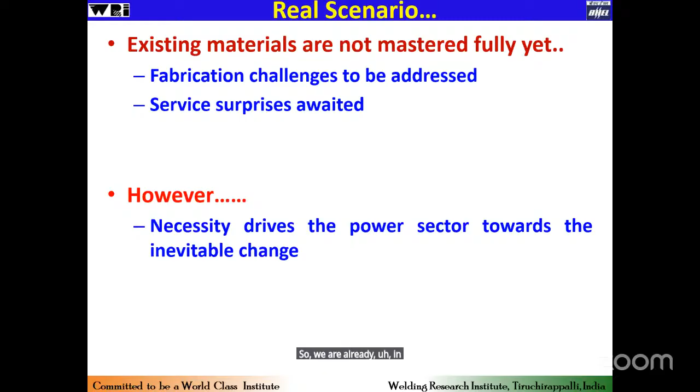I would like to start by sharing some experience with respect to the challenges in the chromoly steel segment itself. These are some of the persisting challenges the power sector industry faces. Long and thick components, when made of high chromium steel, will have multiple joints to be made, especially for header stub kind of applications.

When we talk about higher chromium moly kind of steels, we call them creep strength enhanced ferritic steels. These steels necessitate strict discipline, especially in handling and fabrication. The atmospheric control has to be very stringent - it will not tolerate like what carbon steel does.

There may be a requirement of intermittent heat treatment, especially for thick section fabrication. We may not be able to complete it in one go, or in certain cases we may have to go for repair welding after intermittent or interstage examination. We don't know how many heat treatments are actually allowed. Thumb rule says 3 heat treatments, but we don't know what is actually tolerable.

If only 3 treatments are allowed, and a condition arises during fabrication, it has to be manipulated so we complete the entire fabrication within 3 treatments. That is something we have to really address. But currently the material has been kind enough - even if it's more than 3 treatments, it is still tolerating and working fine.

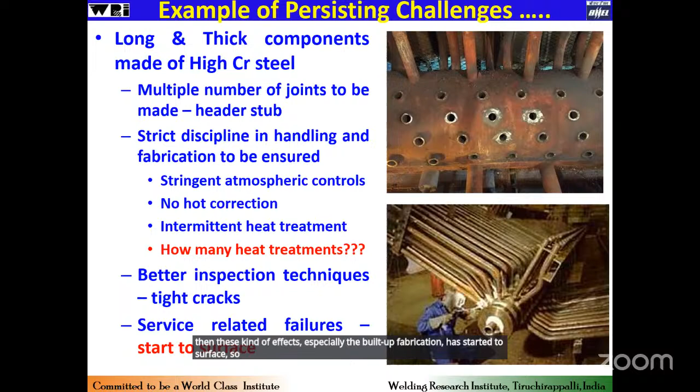We may have to go for better inspection techniques, especially with respect to tight cracks. As I said earlier, service-related failures have started to surface - these materials are highly prone to a typical problem called type 4 cracking, which occurs only in service. When we push the material to that service condition where it is actually meant for, these kinds of defects, especially in welded fabrication, have started to surface. That is something we have to see how we address.

This is not a very new material, but it is newer in the Indian context - the T23 grade material, which is a chrome-tungsten based material. What we observed is that after bend forming, a typical normalizing and tempering heat treatment is carried out. But what was actually observed is that we ended up with poor toughness after doing this normalizing and tempering treatment.

With the facility of the Gleeble thermophysical simulator called the Gleeble Simulator, this has been simulated, and we understood that when cooling rates are low, some deleterious phases - especially ferrite-based deleterious phases - are forming, and that is actually the culprit for reduction in toughness.

When we try to optimize the cooling rates, and the cooling rate crosses the critical value of 2 to 3 degrees per second, we are able to achieve the required toughness, especially the impact property. Based on that, this tempering treatment - the cooling after normalizing - has been modified, and we were able to achieve the required toughness properties.

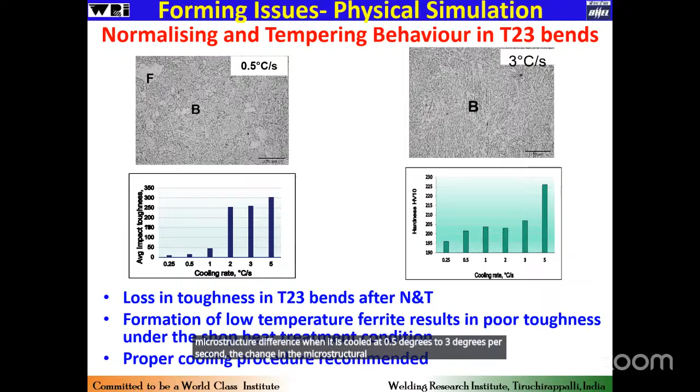As you can see, the microstructural difference when cooled at 0.5 degrees versus 3 degrees per second - the change in microstructure has actually resulted in improved toughness. So that is what I was telling about the older materials - challenges keep cropping up every now and then, and that has to be addressed.

But we are already into the advanced materials. So when we talk about advanced material, there is a total shift.

The cost is huge, exorbitantly higher, 10 to 12 times higher than the conventional material. So that necessitates a design optimization. We no longer have that freedom or flexibility to use the factor of safety at our will and wish. We have to definitely optimize to ensure that the cost is optimized.

Then the higher strength austenitic grades. Austenitic grade is like a savior. Actually, I will be telling one or two experiences in the later stage, whether it is really a savior or not, I don't know. Even though it is still the consumable for solving critical problems or weld related issues, we are going to talk about the higher strength austenitic grades, and it is going to pose different challenges.

And the characteristic of the material is totally different. Welding behavior, of course, is also different. When we talk about such strength and such high temperature stabilities, then the forming behavior is also going to be different. So this is all the challenges that come because of this total shift.

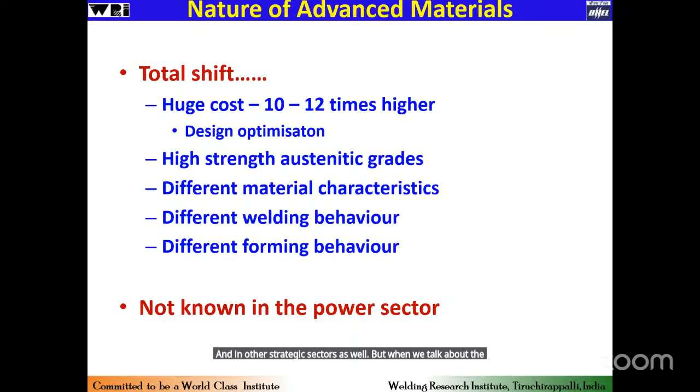And the fact is, it is not known in the power sector. When we talk about these kind of materials, it is a common material used in the aerospace sector, defense sector, and other strategic sectors as well. But when we talk about the conventional power sector, these grades of materials are very, very new for operation.

So when we talk about the development, these are some of the components that have been developed, like thick pipes, headers, coils, valves, and panels. And the materials we have dealt with is from nickel alloy 617, 740H, 62, Sanicro 25, 91, 92.

And welding process development, when we talk about the process development, it includes all the complementary or supplementary processes as well, starting from welding with different kinds of processes, surfacing, non-destructive testing, bending, and heat treatment. So the one thing, thanks to our chairman, all the developments that have been carried out have been done on one-to-one scale.

So when this development has happened, and as per the budget speech in the year '24, the Honorable Finance Minister has agreed to help in setting up this advanced ultra supercritical facility, so it will be a reality.

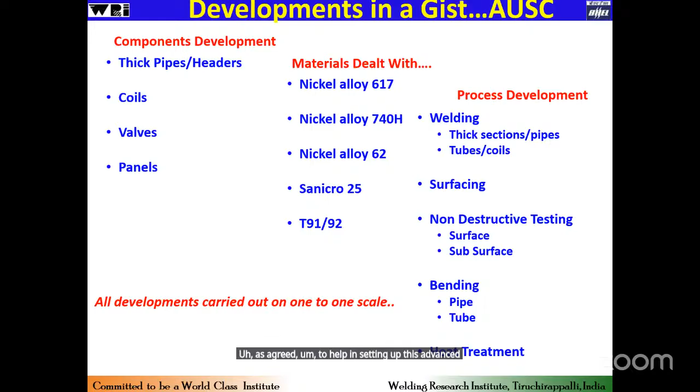So the physical metallurgy of the nickel-based superalloys, it is highly alloyed. So it has two kinds of strengthening. One is solid solution strengthening, and the other is solid solution plus precipitation strengthening. So when we talk about the thermophysical properties, especially the coefficient of thermal expansion, thermal conductivities, and so on, it is going to be between the ferritic steel and austenitic stainless steel.

And grain boundary strengthening by carbides, but this is not very new. It has been happening in our chromoly steels as well. Highly stable at higher temperatures - that is the thing that is being brought by these advanced grades of materials.

And when we talk about the mechanical properties, they are excellent in terms of strength, ductility, and impact toughness. And other than that, it also exhibits high work hardening behavior. So that is going to pose different challenges, especially when we talk about the forming studies.

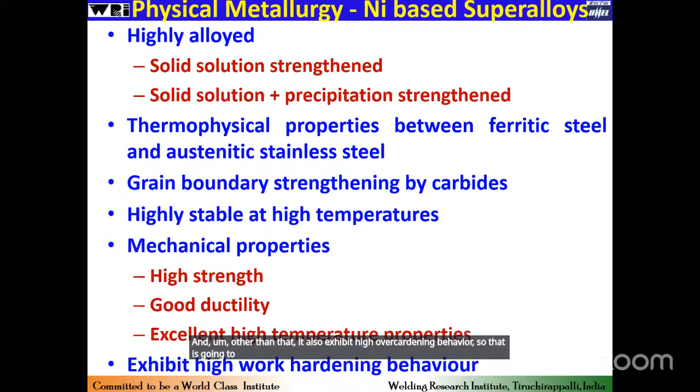So when coming to the welding metallurgy of the nickel-based superalloys, it is somewhat similar to stainless steel - when I say stainless steel, it is austenitic stainless steel. However, it is highly sensitive to impurities. It cannot tolerate impurities, especially sulfur-based impurities. It will never tolerate grease, dust, and so on.

The tolerance level is very low, and it is highly sensitive to heat input. So when I say this, it can lead to all kinds of cracking, like liquation cracks, which is usually seen in any austenitic grade of materials. So we have to go for lower heat input based processes, and then stringent interpass temperature maintenance with any austenitic material welding. The interpass temperature between the adjacent passes has to be controlled and maintained throughout.

And another thing this nickel-based superalloy brings is the sluggish molten pool. The molten pool is highly sluggish, so that means it will not flow. So when it is not flowing, it will lead to insufficient filling and can lead to cracks like crater cracks, and also chances of lack of fusion will become more.

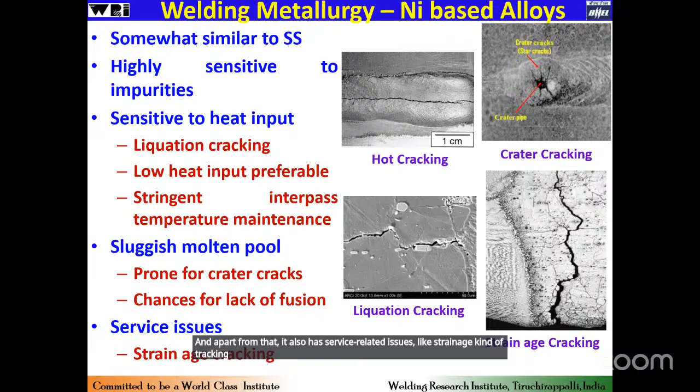So what we have to do is position the filler material or the molten pool in the area of interest exactly. We will not have the flexibility that we had with conventional materials. Apart from that, it also has service related issues like strain-age cracking behavior, as you can see shown on the right extreme.

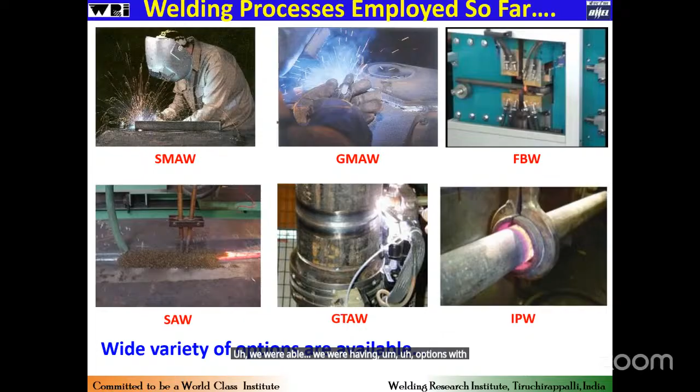The welding processes used so far for conventional fabrication include SMAW, GMAW, flash butt welding, induction pressure welding, gas tungsten arc welding, and submerged arc welding. We had a wide variety of options available for materials used in conventional power plants with respect to fabrication.

But when we talk about these advanced grade materials, newer processes have to be adopted, like hot wire gas tungsten arc welding, one of the advancements in the TIG welding process. Hot wire GTAW is used for 1G position for tubes and 1G or 5G position for pipes.

Narrow gap welding will become mandatory because, as I mentioned earlier, the sluggish molten pool will necessitate positioning the molten pool in the area of interest. Otherwise, there is a chance of lack of fusion kind of defects. So narrow gap TIG welding, with hot wire, for thicker joints.

This is a TipTIG process where wire feeding can be automatic, and in certain cases power beam welding process, especially for restraint joints with higher strength materials, the lower input process like power beam processes may be beneficial. So the industry is turning its eye towards this kind of process as well.

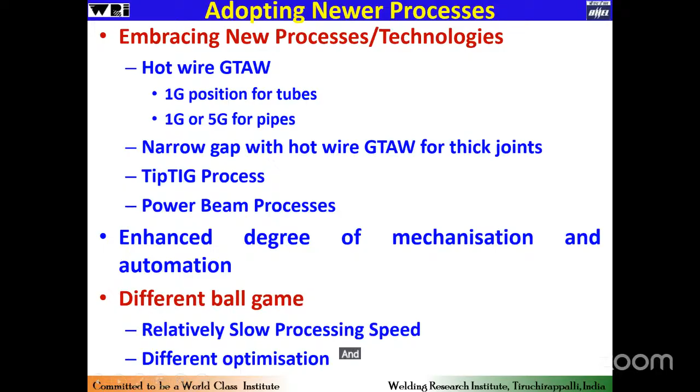An enhanced degree of mechanization and automation will become necessary. It is going to be a different ball game, so different kinds of automation and optimization will be required.

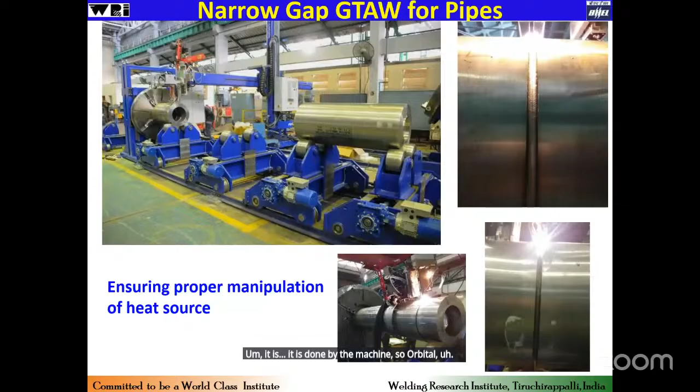When it comes to pipe fabrication, the narrow gap hot wire GTAW process, as you can see here, conventionally this grade of material is nickel based superalloy having a thickness of more than 100, and this has to be welded for some critical components.

That necessitated the use of this advanced process called hot wire narrow gap GTAW. Conventionally, when we want to weld these thicknesses, we prepare an edge with wider angles so the torch can access the root. But in this case, it is welded from one side with a very narrow groove having an angle of 2 to 6 degrees at the top, and we were able to complete it with a single pass per layer.

I've said this very easily, but this is what we have done. As you can see, we have done the optimization in 1G as well as 5G - 1G where the pipe is rotated, 5G where the torch is rotated in the narrow gap condition.

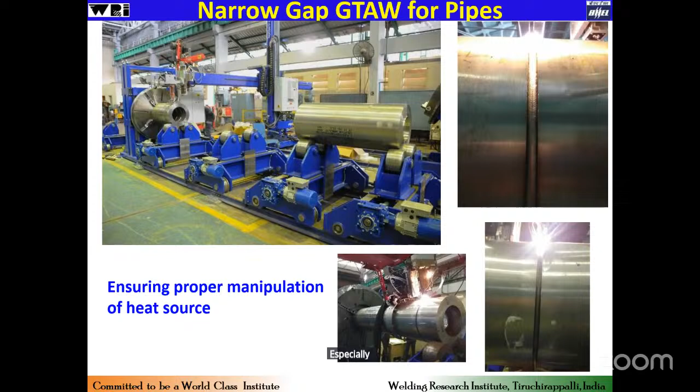This was said so easily, but the development really posed different challenges for us, especially controlling the deposition properly and avoiding defects like lack of fusion. So we had to do proper optimization.

The edge design or joint design itself has been optimized accordingly to ensure we achieve penetration at the root from the top side, and we are able to manipulate and oscillate the electrode properly to ensure there is no lack of fusion kind of defect. That is something which has been done, and you see on the right side the welded component.

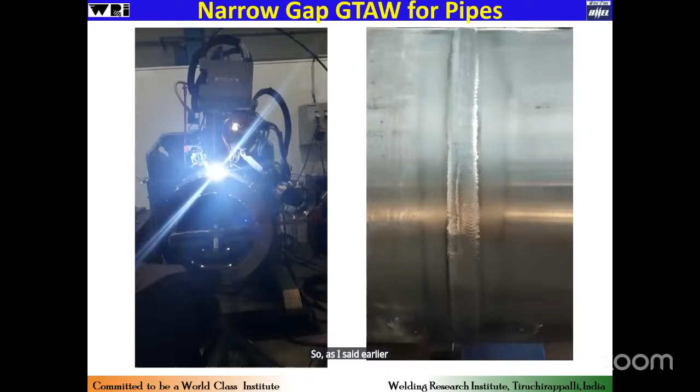As I said earlier, you can see the top width of the weld joint is very, very less compared to the thickness. So top width will be only 10 to 15 millimeters for a total component thickness of around more than 100 millimeters.

As I said, that is about similar welding, but there will also be a need for dissimilar welding combinations. Because when we talk about cost optimization, one factor is reduction in thickness, and the other is tailoring the material according to requirement. So we position higher grade materials where needed most, and lower grade or lower strength materials elsewhere, so that cost is optimized properly.

That is done from the engineering perspective, but from the manufacturing perspective it's a totally different combination. When we talk about such dissimilar combinations, especially with thicker sections, the heat treatment has to be different, and that poses a different challenge.

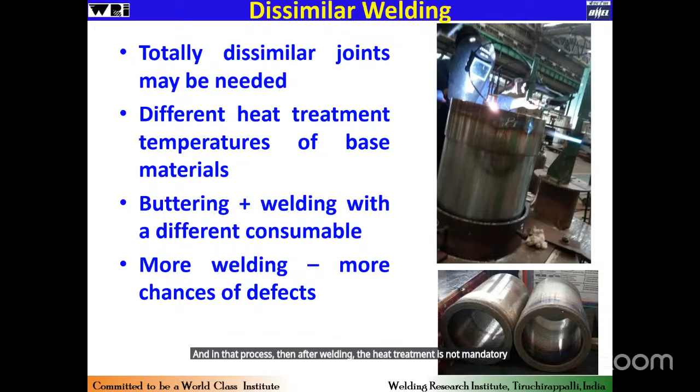So what has been done is, we choose a consumable compatible with both grades of material, and that consumable is deposited by buttering, where we deposit more than 20-25 mm, and then it is individually heat treated according to the temperature requirement for that base material. Then edge preparation is done, and similar welding between the butter-to-butter layer is carried out with the buttering consumable. In that process, post-weld heat treatment is not mandatory - it can be done to reduce or alleviate residual stresses, but it's not a mandatory requirement.

As I said, chromoly steel is not new for the advanced ultra-supercritical technology, but the higher chrome moly steel in panel fabrication is something new which has not been done earlier.

The tube is welded to a fin, and there have been challenges with the GMAW process. One of the challenges is skip - some unwelded portion - and improper deposition and porosities are defects we have been facing so far.

And we wanted to try and develop a newer process, that is laser hybrid welding - bringing the advantage of both processes together. So laser coupled with GMAW, we will be able to achieve entire penetration from the top.

When we use only the GMAW process, we have to do the welding from both sides. So we used to have 10, 12, 20 torch kind of machines where the welding happens at both areas, top and bottom, that is a fillet weld. But with laser hybrid welding, the joining happens only from the top, and it penetrates through the entire thickness.

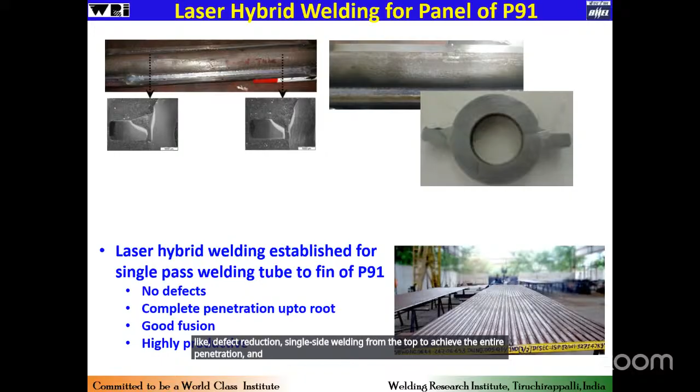And we have also attempted the laser based joining process for welding of tubular components, especially which is in the laser regime.

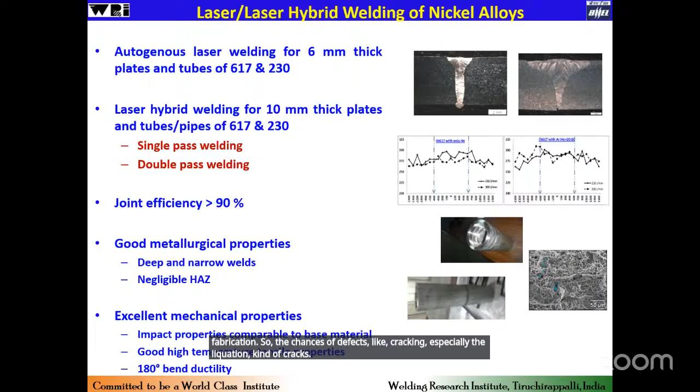Here also we have optimized the process for both autogenous as well as the hybrid mode. So both have been done and both have been proved. Laser definitely brings in advantages, especially with respect to low temperature, low heat input fabrication, so the chances of defects like cracking, especially liquation kind of cracks, are reduced when we go for the laser based joining process.

Nickel is a material where we go when we have a problem in weld fabrication. We thought it would be simple to do the hardfacing on a nickel based material, so we did that. This is something we have attempted for the first time, where internal deposition using plasma arc welding improves the wear resistance of the nickel based superalloy that is made.

So here we have developed the process. When we did it on the plate, there was no problem, perfectly okay. But when we tried to transform it into actual fabrication in the tubular component, and did the deposition inside, we can see that it has actually cracked. So nickel is not going to behave the same way, especially when we talk about such constricted or restricted areas for deposition.

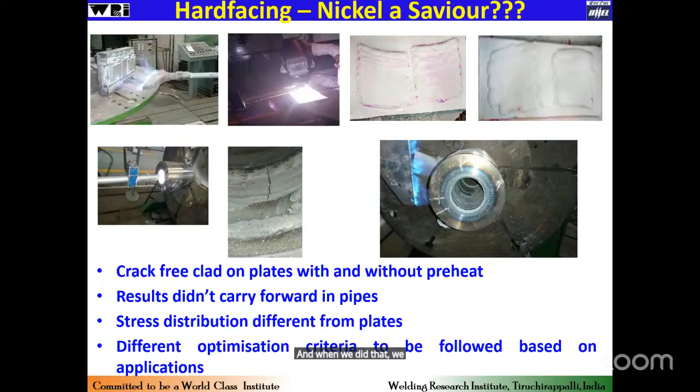So again, we have to optimize in such a way that the preheating has to be optimized and the cooling rates have to be controlled. And when we did that, we were able to overcome this issue, and this has been optimized.

When we talk about such higher grade materials, there will be design requirements where we have to go into inaccessible locations, or go to a depth of more than 500 and do welding. That has been conventionally done with shielded metal arc welding, where the rod length is more than 400, or more than 300, so the welder can easily insert his hand and weld all around. But when we have to do such welding with the GTAW process, it becomes a difficult task.

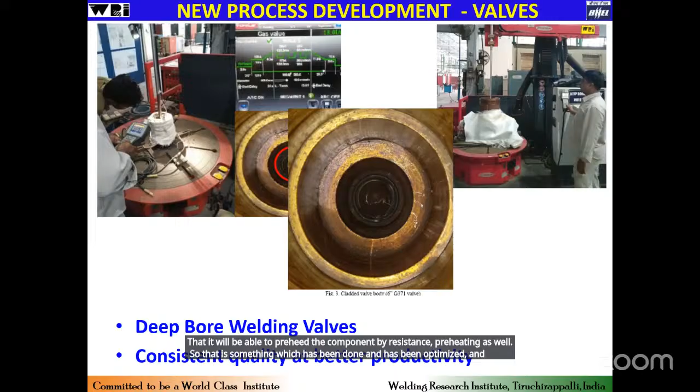So when we talk about advanced materials, we have to go for a better process like the GTAW process. One such special purpose machine has been developed with support from Fronius India for deep bore welding applications. The specialty is that it has a narrow torch which can go to a depth in excess of 600 and do the welding all around. Apart from that, the base is so designed that it can preheat the component by resistance preheating as well. This has been optimized, and we could establish the process without any welding defects.

Not just that, since we are talking about austenitic materials, all the inspection problems with austenitic materials are also present with this nickel based superalloy. So non-destructive testing processes had to be optimized, including penetrant, radiographic and ultrasonic testing.

What has been done is we validated with known defective samples, and based on that, the penetrant time and developing time have been optimized within the code regulations, with respect to conventional LPI. For coarse grained austenitic welds, we cannot use a conventional shear wave because of its high attenuation, especially due to absorption and scattering, so we have to go for angle beam longitudinal waves, and that has been done.

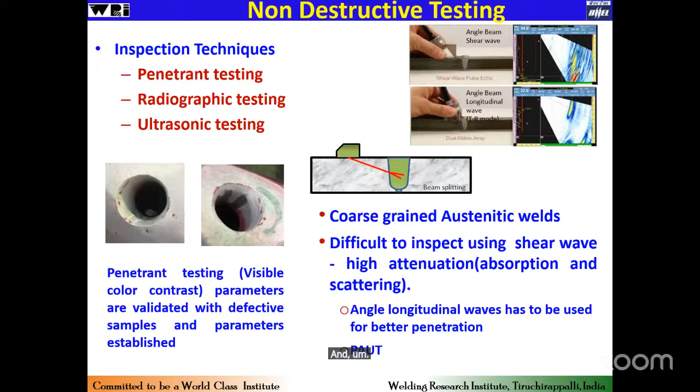And of course the use of phased array ultrasonic testing has also been successfully established, ensuring that all fabrications have been tested by advanced phased array ultrasonic testing, especially for critical applications. We have understood and optimized this, and now we have the expertise to do the inspection as well.

Even with radiographic inspection, it is not going to be the same as what we see in the case of steel, because of the difference in absorption coefficient. The steel equivalent of Inconel is 1.3.

The other problem is nickel oxides, the oxide inclusions, are difficult to detect, especially when they are thin, and most of the oxides, especially with the GTAW processes, are thin and oriented parallel to the surface. So there is a chance that we miss it. That is something we have to capture at different orientations, and then ensure that defects are not missed, if radiography is the only feasible technique.

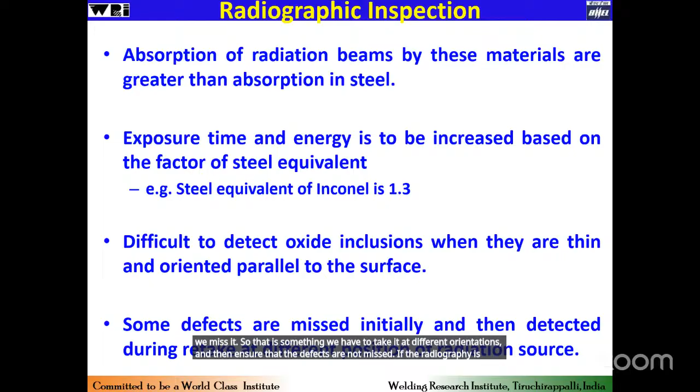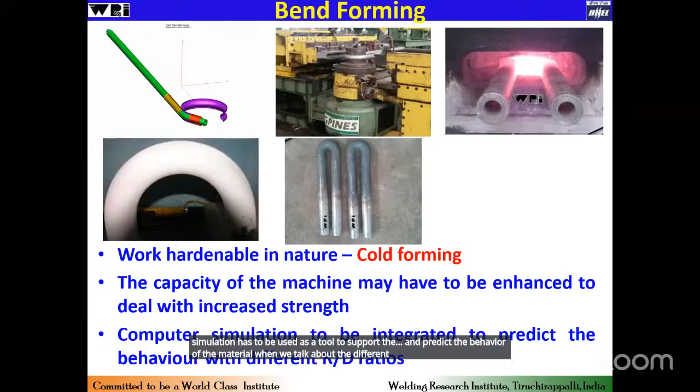We also talk about higher strength, work hardenable materials which gain strength during processing, especially in forming conditions. This work hardenable nature poses challenges with respect to cold forming, so the capacity of the machine has to be enhanced. Computer based simulation has to be used as a tool to predict the behavior of the material for different R by D ratios, the radius to diameter ratio. We also had to go for computer simulation, and that has been carried out, then the bend forming.

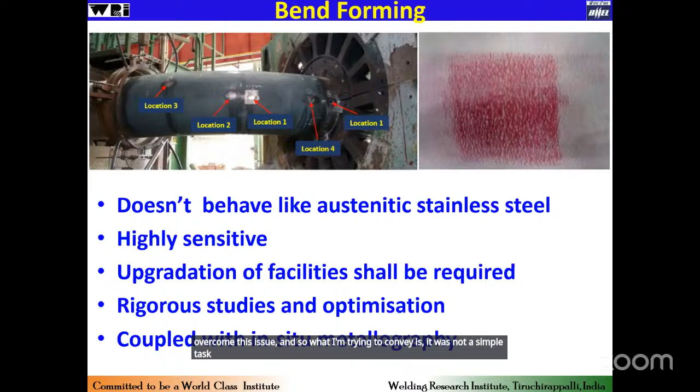And heat treatment - if the design engineer wants flexibility, the component shapes can be odd as well. Especially with these nickel based superalloys, the heat treatment temperatures are also going to be different, so we have seen dissimilar welding too. The temperature required for the nickel based superalloy is around 900 to 950 degrees centigrade, and in certain cases we may have to go for solution annealing in excess of 1100 degrees centigrade.

For in situ heat treatment, one advantage is that thermal conductivity is not very high like in conventional steel material. But for these grades and thicknesses, we needed higher capacity facilities for in situ heat treatment, and that has been done and mastered. Now we know the winding of the coil, in what spacing it has to be done for what kind of configuration, so that we can achieve the desired temperature for the entire soaking time, meeting the code requirements. We also had to control temperature stability, and we could establish the heat treatment for such grades of materials.

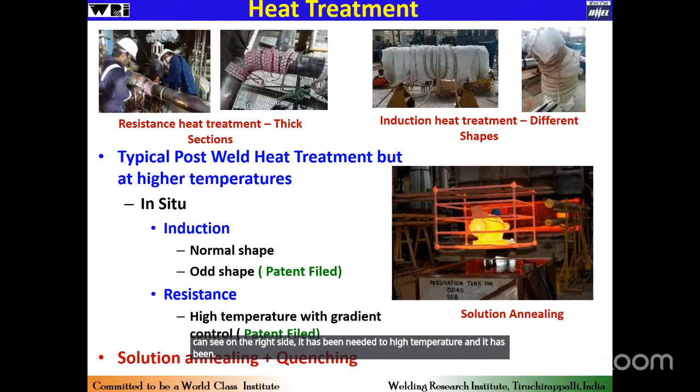As I said earlier, in certain applications when the combination of materials is so different, we will not be able to do a single heat treatment to cater to the final application requirement, so we have to go for solution annealing. One advantage these austenitic grade materials bring is that solution annealing solves most of the issues. This is something we could do for three different grades of austenitic stainless steel. As you can see on the right side, it has been heated to a high temperature and cooled fast - quenching has been carried out.

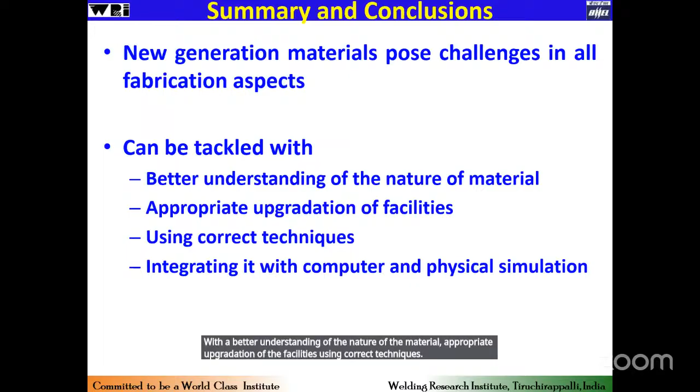To summarize, the newer generation materials pose challenges in all the fabrication aspects. This can be and has been tackled with a better understanding of the nature of the material, appropriate upgradation of facilities, using correct techniques, and integrating it with computer and physical simulations. That is all about our experience sharing in that high critical application. I will finish the presentation.

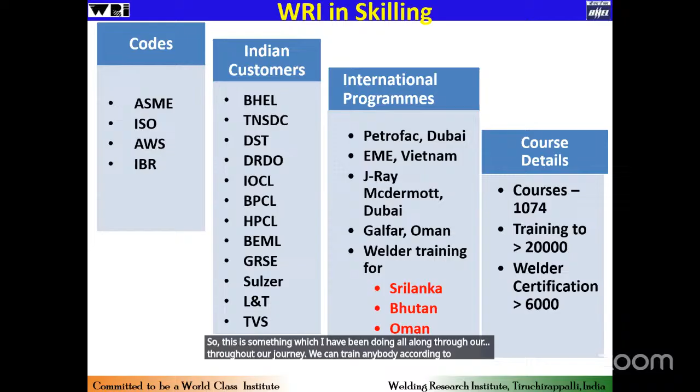I will take hardly 2 to 3 minutes to touch upon the skilling initiative that WRI is doing in collaboration with the Ministry of Heavy Industries. The Ministry has recently sponsored a project called the Common Engineering Facility Center, the CEFC 5000, where we have been given the responsibility of training welding professionals in huge numbers, in excess of 5,000 year on year. This is something we have been doing all along throughout our journey - we can train anybody according to any code, in any material, at any level. WRI is also into PG certificate programs, conducting a 1 year PG program in collaboration with the PSG College of Technology in Coimbatore.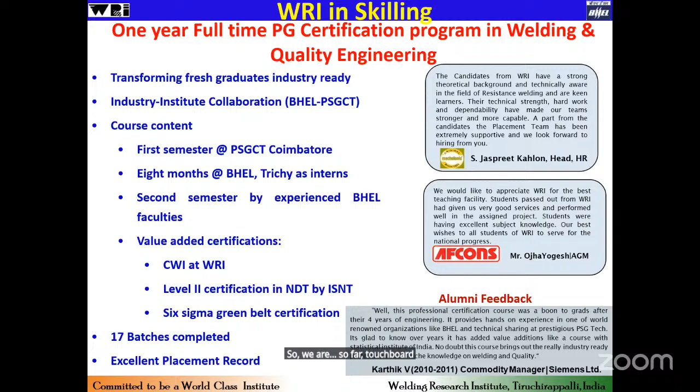This program has been running for the past 18 years, and the 19th batch will be recruited shortly in the month of June. It is a 1 year PG certificate program, and the idea is to transform fresh graduates into industry-ready professionals, so that industries will be able to rely upon their capabilities in weld fabrication.

So we have so far, touch wood, all the candidates who have completed this program have been placed well. Coming to the Common Engineering Facility Center, WRI will not be able to cater to this 5,000 number alone, it would be huge. So we have taken the support of 5 different units of BHEL located in Ranipet, Haridwar, Jhansi, Bhopal, and Varanasi, working with a hub and spoke model, with WRI acting as the hub and these units as the extension centers.

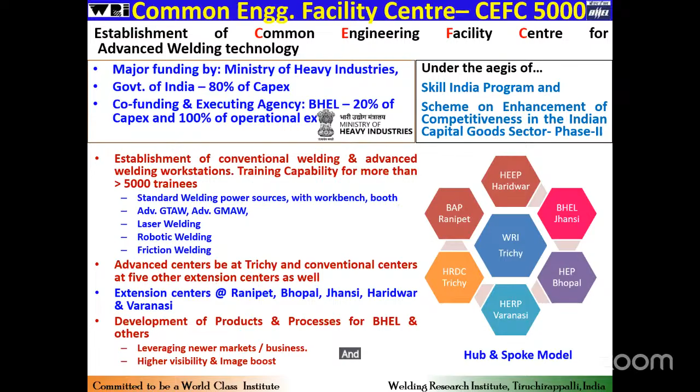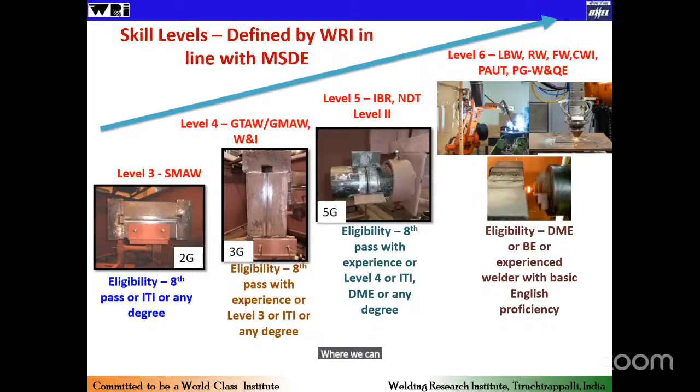This also helped WRI fulfill its long pending dream of having extension centers in the country. With this, we could establish training centers in 5 different locations. We have further upgraded our facilities, and we do training at all levels, from level 3 to level 6, designed and developed by WRI, where we can train welding professionals in any process. These are some glimpses of the extension centers, and training is already going on in full swing.

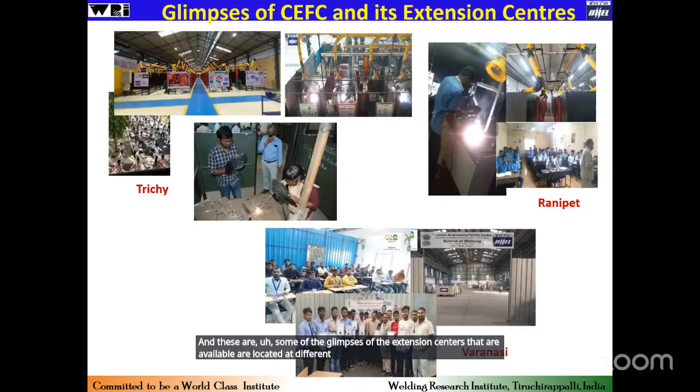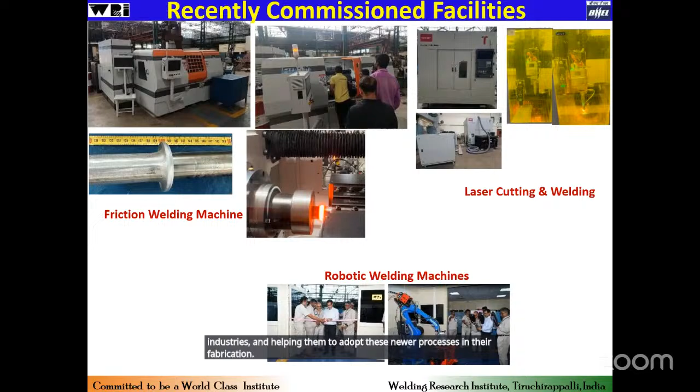We have also upgraded our facilities with a new friction welding machine, laser welding and cutting facilities, and a robotic welding machine. These will be used not just for training, but also for developing engineering solutions required by industries, helping them adopt these newer processes in their fabrication.

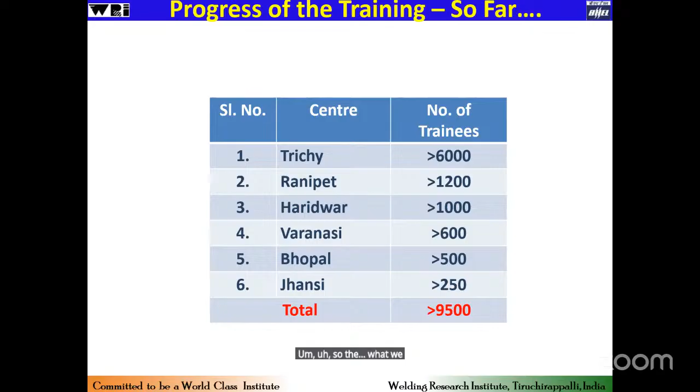With that, we could achieve in excess of 9,500 trainings so far with the support of the extension centers. What we thought was a huge target, we could achieve, especially with the support of the extension centers. So that is in brief about the capabilities and experience with respect to high temperature fabrication development carried out at WRI. Thank you, one and all.